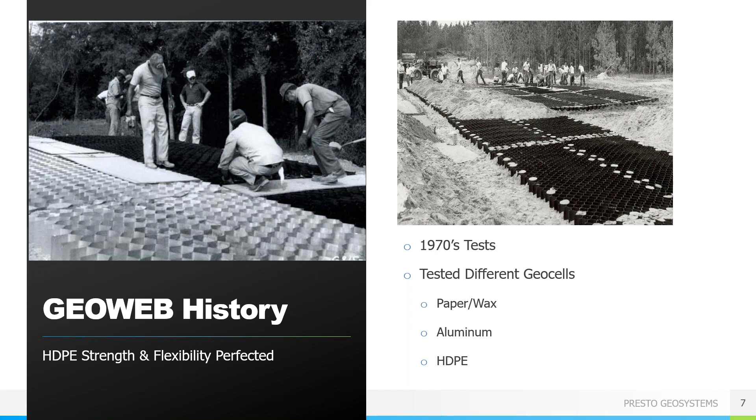What the Corps was looking to do was make beach landings easier by confining that loose beach sand, and they were quite happy with the high-density polyethylene in the end.

The GeoWeb system consists of two main attributes: cell size and cell depth. The cells come in three diameters—small, medium, and large—and cell heights of 3, 4, 6, 8, and 12 inches. Cell aperture and height are selected following an evaluation of project-specific needs and site conditions. To facilitate installation, we offer 5 different section lengths.

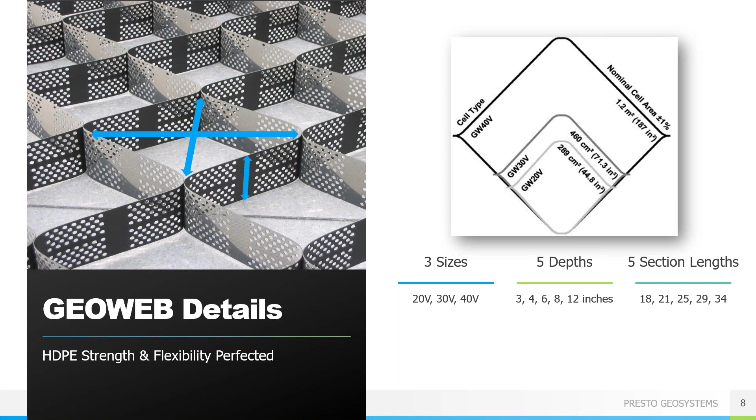The ultrasonically welded seam, where all of the connecting points are, is very important to the function of a geocell. The stronger the seam strength, the better the performance of the geocell. Strong seam allows for a heavier infill material, steeper and taller slopes, and better lifetime performance.

GeoWeb is produced using high-quality virgin, high-density polyethylene resin for consistently strong welds at cell junctions, while also maintaining semi-rigid ductile properties within the cell walls, high stress crack resistance, and overall toughness and long-term durability in the environment.

Our geocells do not use fillers or exotic polymer alloy blends, which can ultimately reduce weld strength and environmental stress crack resistance, and that are offered in some competing products in the name of increasing cell wall stiffness. To avoid weld failures and the damaging effects of differential settlement, uniformity in performance across all elements of a geocell system is much more important than stiffness alone.

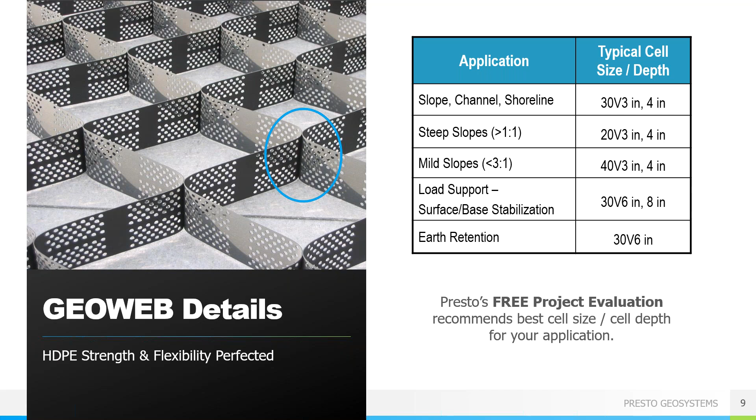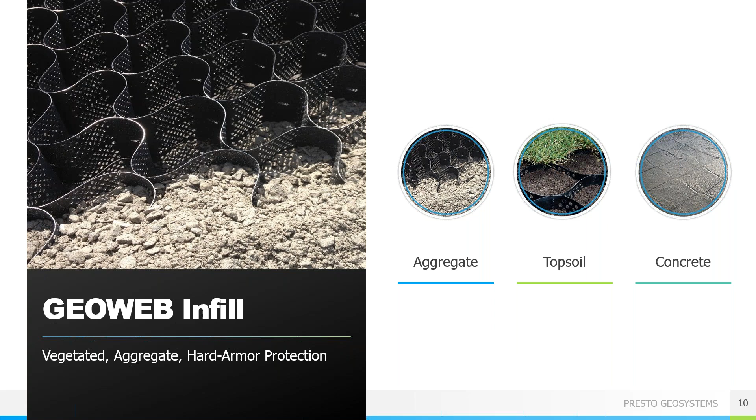There are three main infill types for any GeoWeb application, depending on the type of protection needed: topsoil, aggregates and granular soils, and concrete. In most cases, geocells allow for the use of on-site materials without the need to import fill, generally with the only limiting factors being that the material should be angular and the maximum particle size should be about 1/3 the cell depth.

Here we can see how the material ships. It's tri-folded, banded, and palletized. So it does ship quite compact, which can lead to relatively low freight costs.

The material is lightweight, so no heavy equipment is needed for installation. The nominal width for each section is 8.5 feet, but you can make them longer and skinnier, or shorter and wider. We do want to keep that width dimension between about 7.5 and 9.3 feet.

The length will depend on the amount of expansion and the number of strips welded together. Generally speaking, the length can vary between 12 and 58 feet long, with the 8.5 by 27 foot section we're showing here being pretty typical, giving you about 230 square feet of coverage for each section.

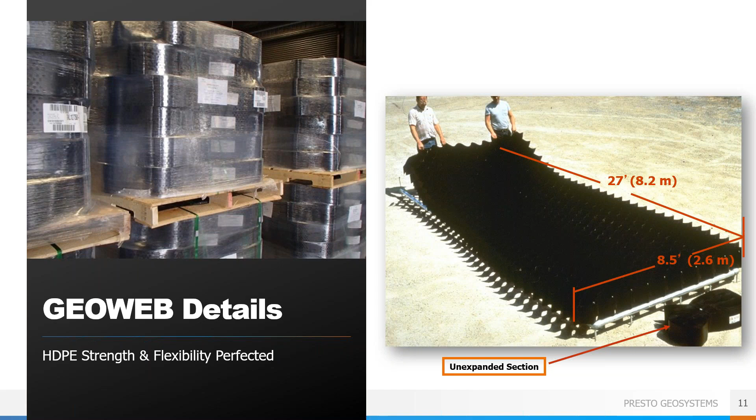In order for a geocell system to perform uniformly, it is critical that both the factory welded junctions or internal junctions and field joined junctions that connect individual panels together perform at a level commensurate with that of the cell walls. The three primary elements of any geocell system—cell walls, internal junctions, and connectors—must perform uniformly as a complete system. Therefore, an incremental improvement in one characteristic, such as cell wall stiffness, is only valuable if a complementary improvement has been made in the other components of the system.

GeoWeb is manufactured using a proprietary blend of high-quality virgin HDPE. Our formulation has stood the test of time for more than 40 years and contains no fillers, unstable polymer combinations, or alloys. For most typical sites, GeoWeb will retain its durability, with lab testing indicating 149 years before any degradation occurs, even at full exposure to the elements.

We stand behind our specifications so you can deliver certainty in the solution as you build with materials you can trust.

Made from high stability inert materials, GeoWeb geocells are your permanent stabilization solution and will not degrade, leach, or release microplastics into the environment.

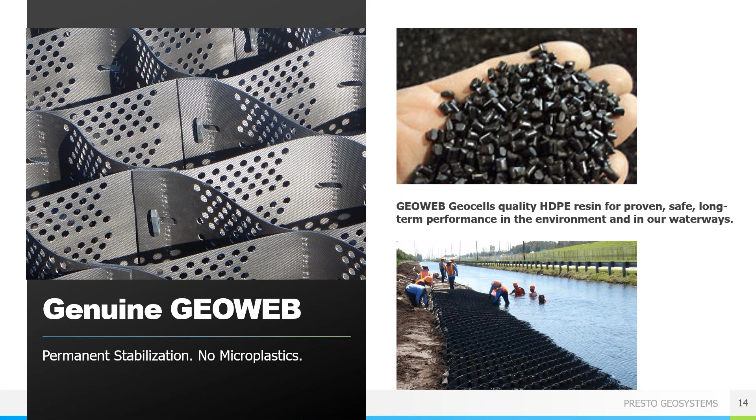Our base resin is the same material used in environmental applications such as geomembranes and other environmental barriers to protect against the spread of harmful toxins. Our products have been third-party tested by accredited geosynthetics laboratories, confirming long-term stability against environmental factors such as weathering and oxidation.

GeoWeb and all of our accessories are 100% made in the USA under strict quality assurance and environmental control processes, to comply with all requirements for Build America, Buy America, and the Infrastructure Investment and Jobs Act.

Presto's GeoWeb is equipped with numerous design and construction components that increase strength and speed of installations. We have a variety of staking options. The standard method is to use our Atra stake clips on top of a 1/2 inch diameter or number 4 rebar. But if long-term corrosion is a concern, we can also provide high-density polyethylene speed stakes.

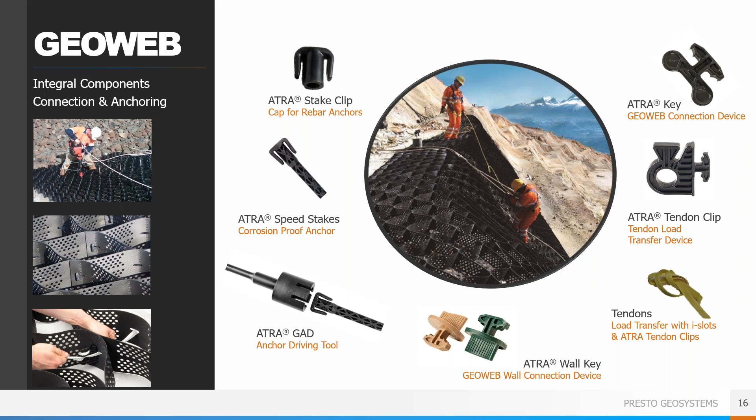Atra keys are the mechanical connection I mentioned a few slides ago. Not only do keys provide the uniformity we discussed, but they are made of the same HDPE material as the GeoWeb itself, so they will last just as long. Beware of manufacturers that recommend staples or nylon cable ties, as these do not have the same long-term durability as HDPE.

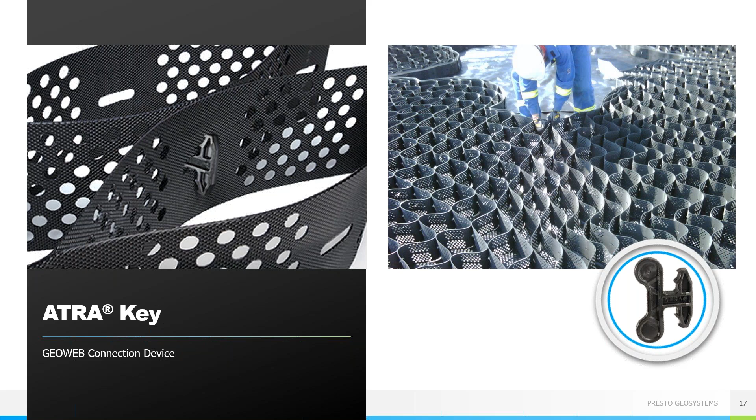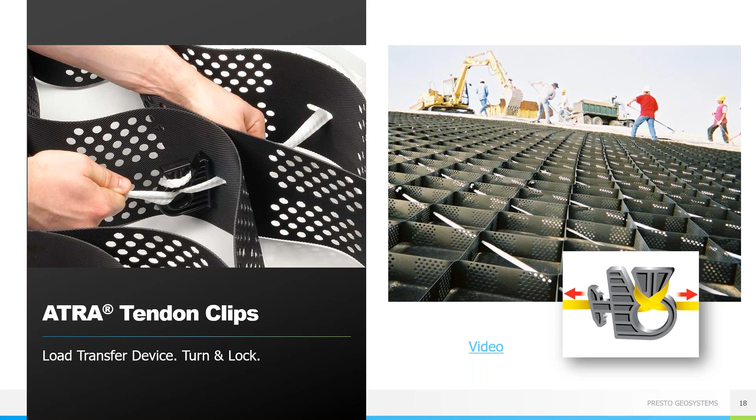The tendon and Atra tendon clip system is ideal for anchoring the GeoWeb on slopes without the need for stakes, which would penetrate the liners used on most landfills. The tendons are tied to either earth anchors or a deadman pipe, which can typically be buried in the same trench as the liner at the crest.

Now we'll go into a little bit more detail on each of the landfill relevant application areas, starting with load support.

GeoWeb can be used for both surface stabilization of unpaved roads and base stabilization below pavements. Many solid waste facilities must contend with maintaining unpaved access roads. Not only can GeoWeb save money up front by allowing you to reduce your overall cross section, but incorporating GeoWeb into the roadway section can also help minimize or reduce annual costs associated with repair and maintenance of unpaved landfill roads that take a beating from heavy equipment and truck traffic.

Generally speaking, the benefits of using GeoWeb in load support applications are that we can reduce your overall aggregate section by 70% or more. We control lateral and vertical infill movement, which prevents shearing, and we create a stiff base with a high flexural strength.

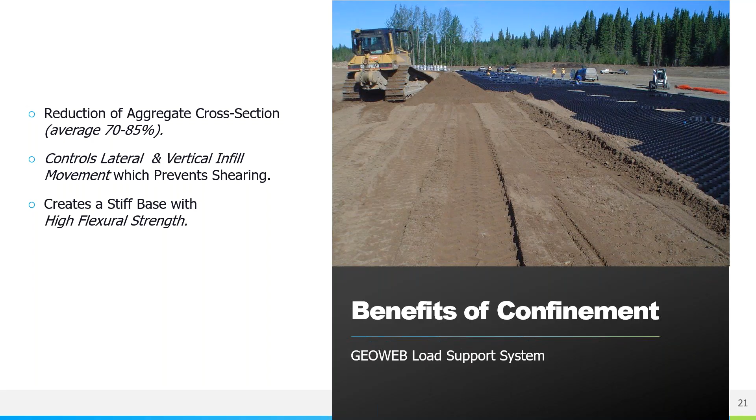Here's how the GeoWeb three-dimensional system works. When a vertical load is applied, the active earth pressure in the loaded cell pushes back against the passive earth pressure in the adjacent cell to form a stable system. Each cell helps support the ones around it.

The GeoWeb cell walls also transfer hoop stress, which is important in keeping the system intact and creates a mattress effect. The strength of the seams around each cell, the material properties of the individual strips, and the connection method between panels are all important factors in determining how the GeoCell system can improve site conditions. Strong seams, semi-ductile resin properties, and integrated connections are critical to a well-performing system. The GeoWeb system and accessories are specifically designed to work together to be an effective solution for roads in soft soil locations.

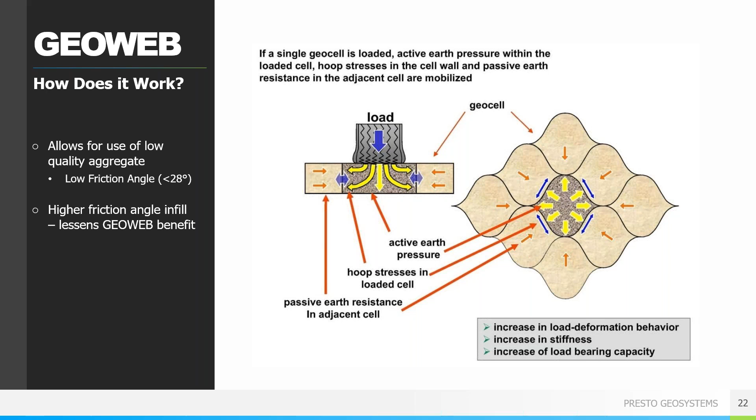Here you can see the stresses on the subgrade, with the unsupported subgrade on the left and the GeoWeb reinforcement on the right. Notice how there is a complete elimination of the highest stresses at the surface with GeoWeb reinforcement. The stresses are reduced and distributed over a wider area, known as the mattress effect. This reduces stress reaching the subgrade and leads to a significant decrease in deflection and rutting.

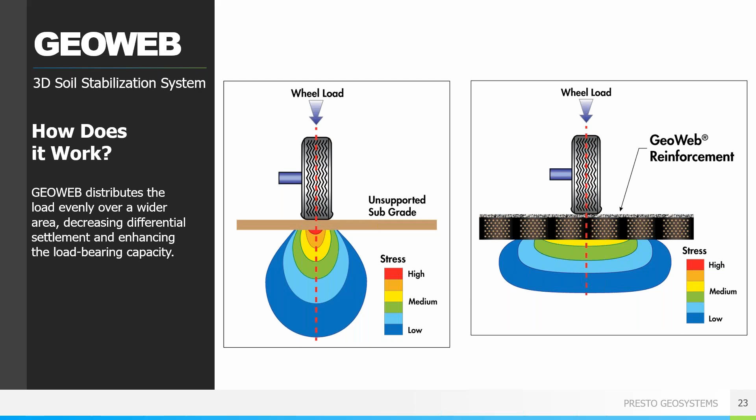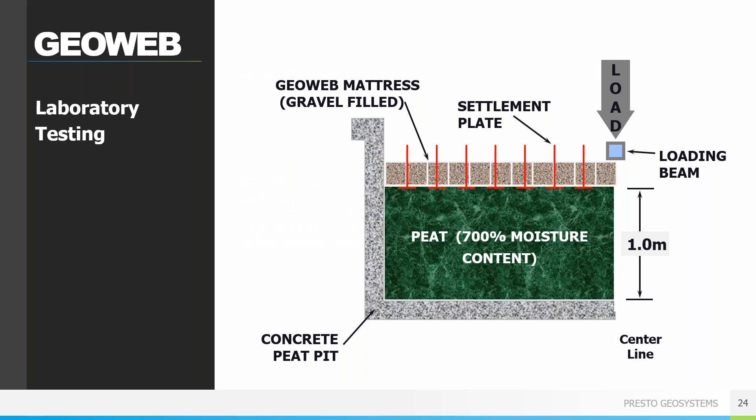I want to quickly review a little of the research that we've done in the past to help increase your confidence in the use of GeoWeb. This first one is a static load test where we started out with a supersaturated peat mixture that was put under varying loading. Over the peat, the GeoWeb section was placed and infilled with aggregate. Settlement plates were placed throughout the GeoWeb section prior to its placement, and a load beam was placed over the GeoWeb and loaded to failure. This was then compared to the same depth of unconfined soil.

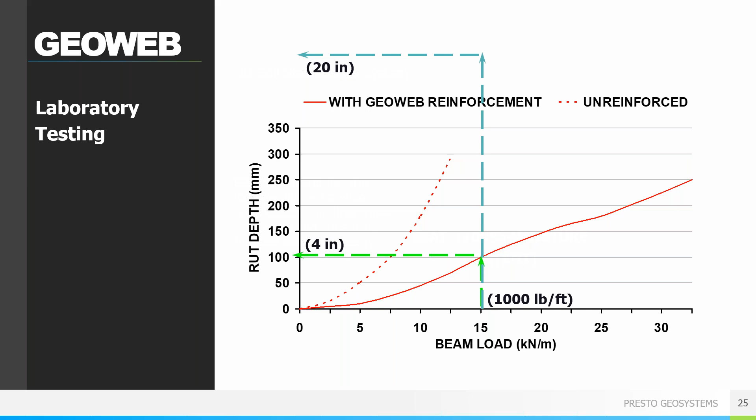The beam test showed that the bases reinforced with GeoWeb provide a significant improvement over unreinforced soils. So for a load of 1,000 pounds a foot, a 4-inch rut depth occurred in the GeoWeb section, whereas that rut was 20 inches in the unreinforced section.

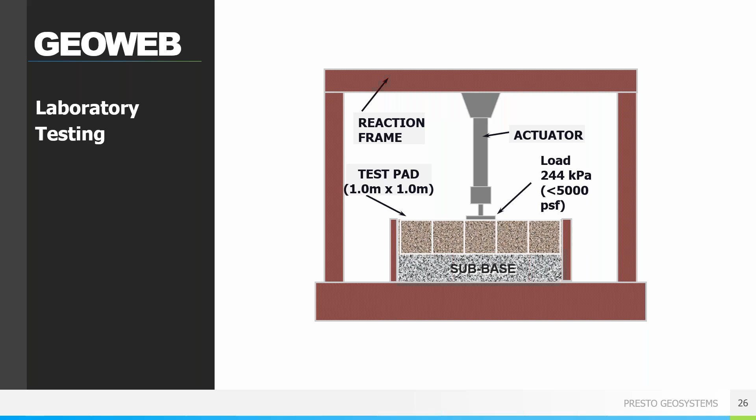Since the previous testing was under static loadings, we also tested under a repeated dynamic load. Pavement load testing compared reinforced and unreinforced materials over the same subgrade. A deflection of 0.6 of an inch is assumed to lead to failure of the pavement system. Therefore, we applied the load repeatedly until that 0.6 of an inch of accumulated deformation occurred. Without the GeoWeb in the section, that took about 25,000 load cycles. By adding GeoWeb, we're all the way up to 400,000 load cycles, an improvement of about 16 times the number of load cycles for the very same deformation.

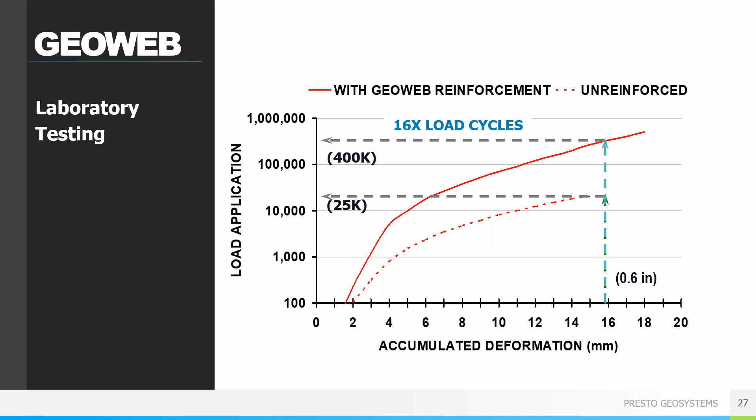We'll now look at a couple of quick videos showing how simple the installation is. Or maybe just one video.

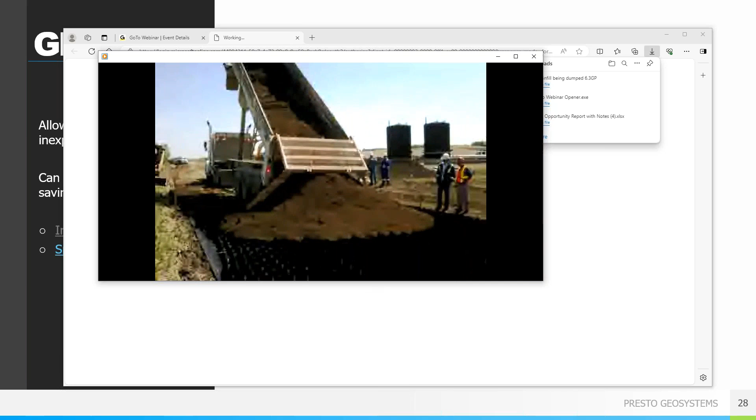Here you can see that truck can back up right to the very edge of where the cells are already filled, and they can simply empty out the bucket. Then they put a bulldozer or backhoe on it and spread the material that way. So it's a very quick and easy installation.

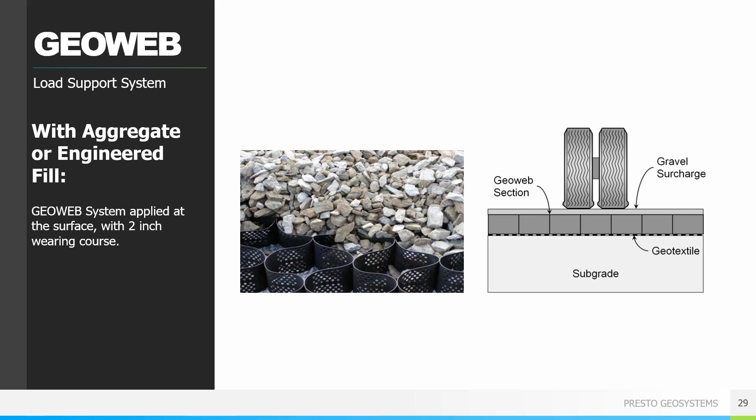Our typical section has a geotextile below the GeoWeb panels. That can be anything from a 6-ounce non-woven to an enhanced woven, depending on your subgrade strength and maximum loading. Then the GeoWeb is generally filled with aggregate, and we do recommend a 1 or 2 inch wearing surface over the panels themselves. Now we'll look at a few examples.

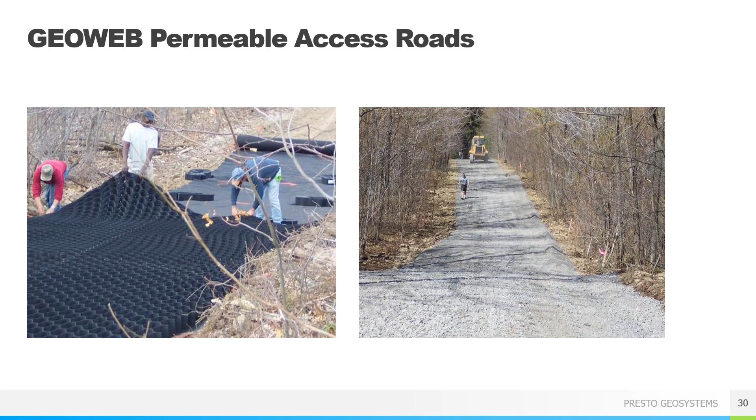Keep in mind, you get infiltration with clean stone infill only, and the permeability of the infill is going to be your limiting factor. Here, 8-inch GeoWeb and aggregate with a 40% void space was used. This allowed for 3 1/4 inches of rainwater to be stored in the pavement section, eliminating the need for additional stormwater infrastructure. You can also see the extremely heavy loads that are able to be handled by the GeoWeb system.

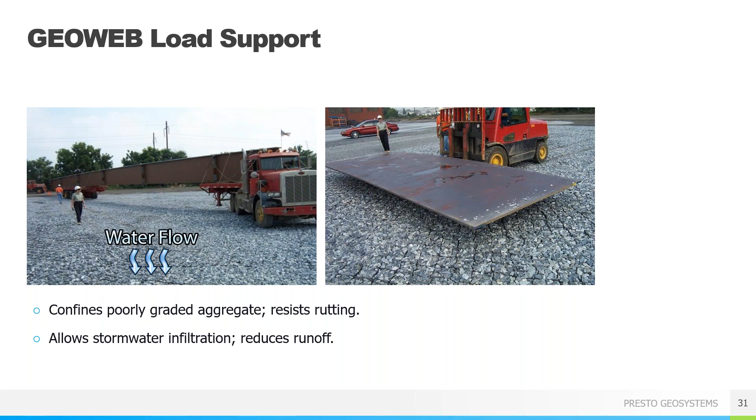One of the biggest questions we get is about cost, which comes as no surprise. So the GeoWeb system costs compared with other stabilization techniques is very important.

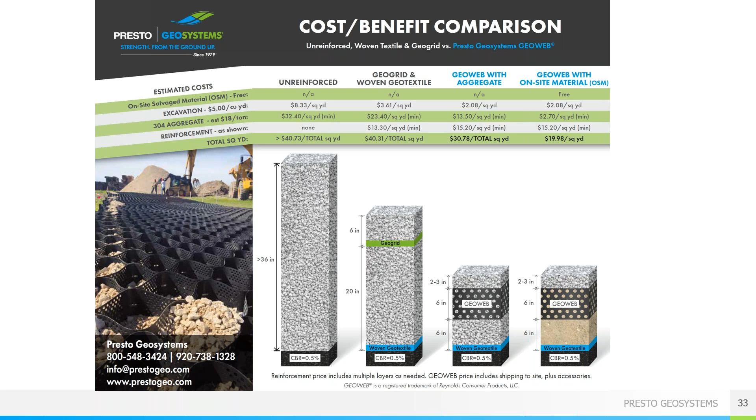We'll now move on to discuss how GeoWeb can be used in stormwater conveyance, a critical component of any landfill design.

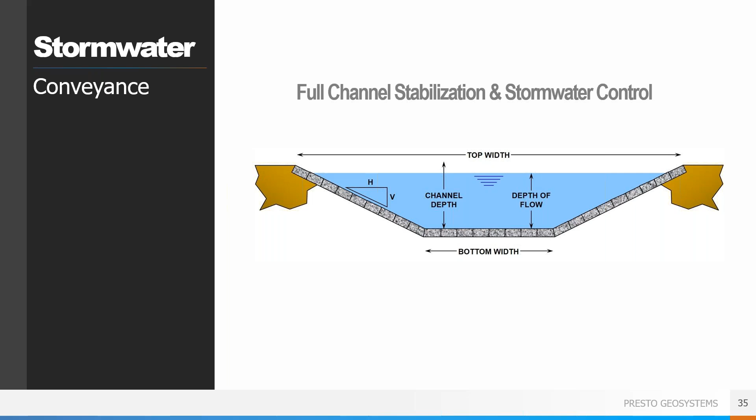Open channel designs with the GeoWeb three-dimensional system offer a more economical solution than riprap, gabions, or reinforced concrete, systems that are expensive and hard to place and maintain. The cellular network creates a system of check dams that protect the upper soil or aggregate layer from hydrological erosive forces that impact unconfined material. And the GeoWeb is going to be much more effective than two-dimensional solutions such as turf reinforcement mats or erosion control blankets that are subject to undermining.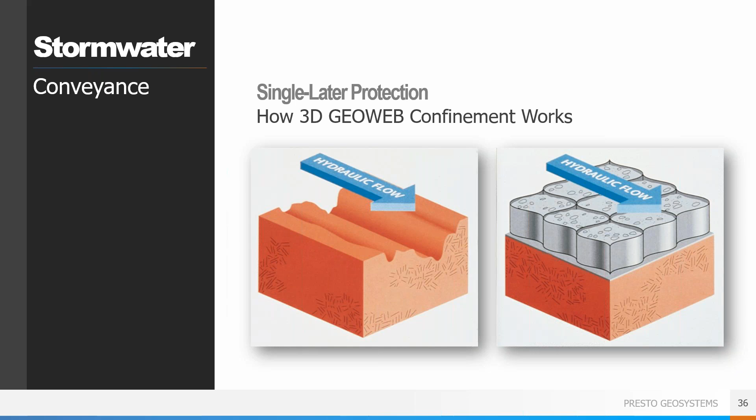The benefits of using GeoWeb in channels are that it will improve the hydraulic performance of whatever infill material you use. With a vegetated infill, we promote infiltration and reduce runoff. With an aggregate infill, we allow the use of smaller, less expensive rock. And with a concrete infill, there's no other form or reinforcement required, and it will flex with subgrade deformation and minimize cracking. Additionally, you can reduce your concrete thickness, leading to significant savings.

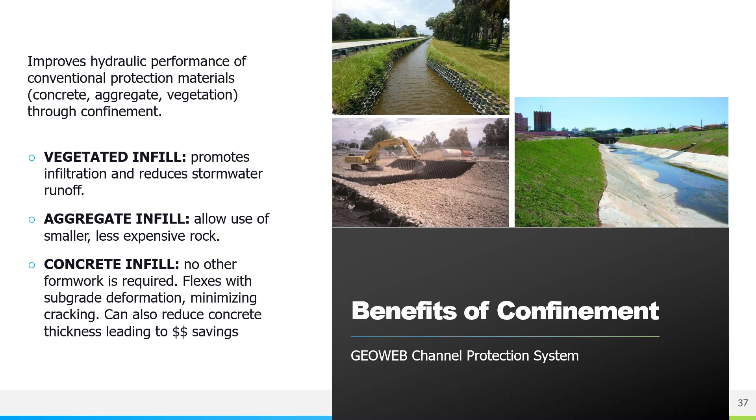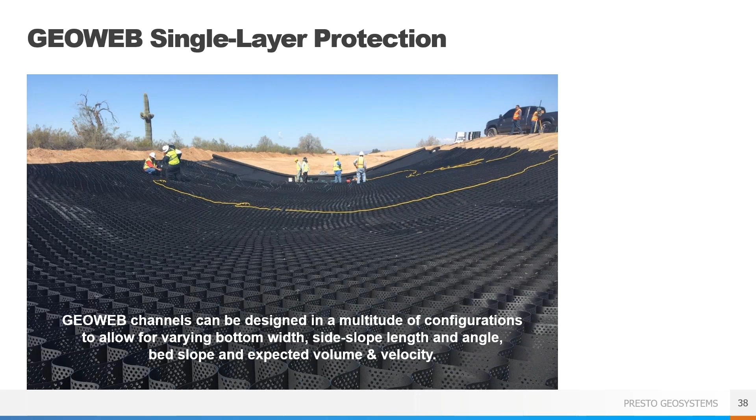Cell size, depth, and anchorage, as well as infill type, are determined based on channel geometry and hydraulic conditions. As mentioned earlier, free project evaluations are available on all projects, regardless of size. The cross-section like you see here, as well as calculations, are provided with every evaluation.

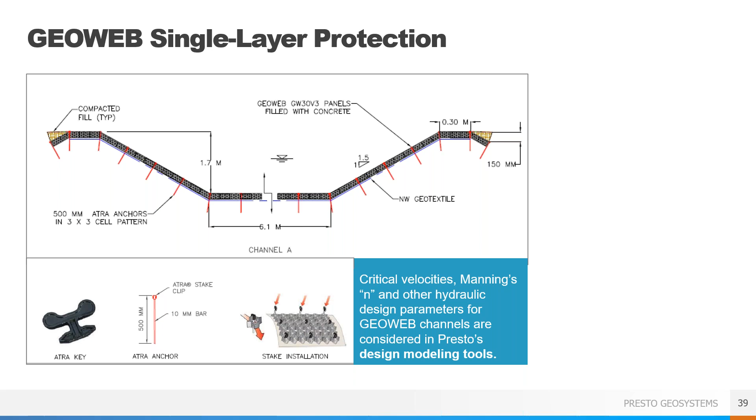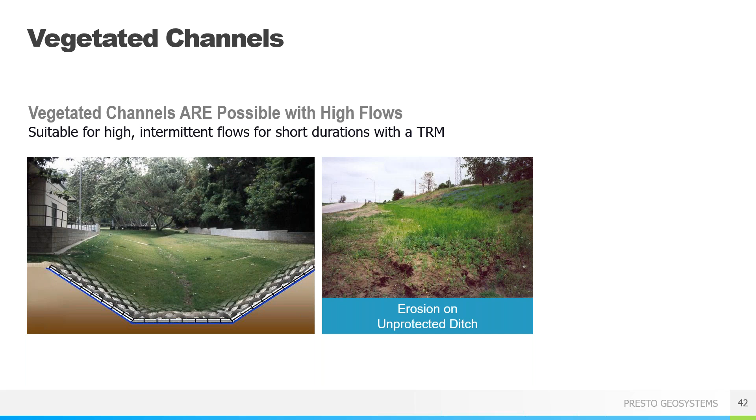Now we'll look at how GeoWeb works with the various infill options, starting with topsoil and vegetation. Generally speaking, low-flow channels like stormwater containment facilities and stormwater channels can be armored with topsoil-filled GeoWeb and covered with an erosion control blanket. But even in high-flow situations, we have a solution that can allow you to protect channels from erosion and maintain the aesthetics of vegetation. This solution involves topsoil-filled cells covered with a turf reinforcement mat, or TRM.

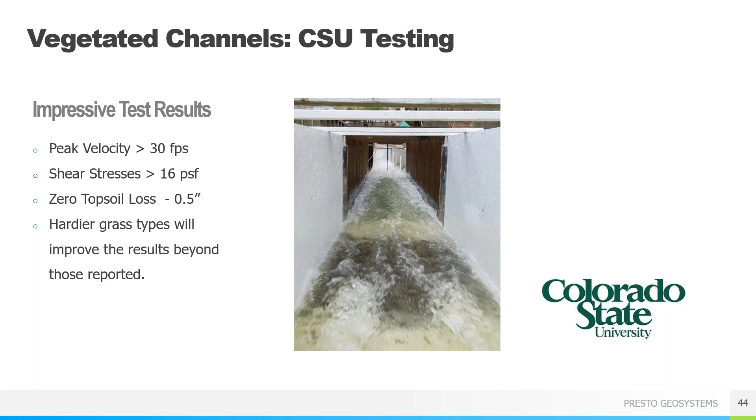We tested the vegetated GeoWeb covered with a mid-grade turf reinforcement mat, not one of the newer high-performance TRMs, and received great results with peak velocities of nearly 30 feet per second and shear stresses of 16 pounds per square foot.

When we compare our results with some other standard practices, we see that we have more than twice the hydraulic resistance of 12-inch riprap and about double the performance of a high-performance TRM alone.

This combination system works because the TRM provides a cover so the GeoWeb does not scour out under high velocities, and the GeoWeb will confine the soil below the TRM so that the system won't fail when saturated. So in an unvegetated condition, GeoWeb will improve the hydraulic performance of a TRM alone by 50%.

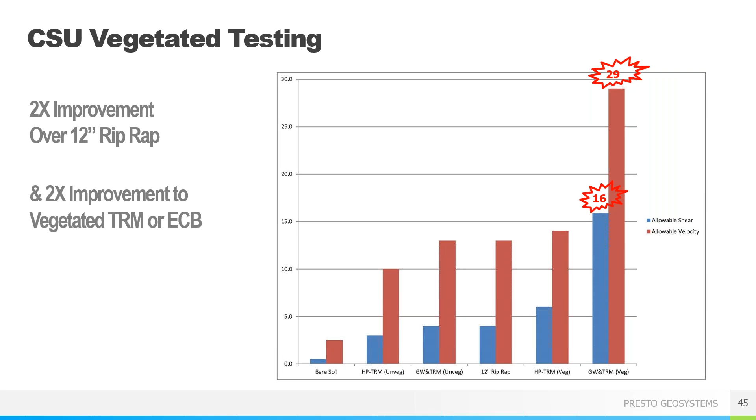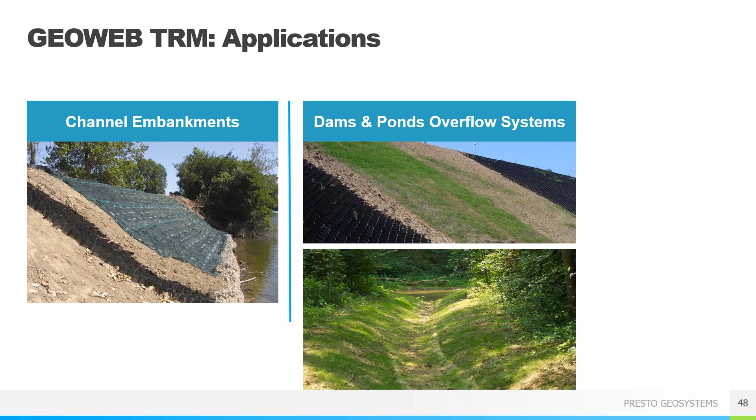Typical applications for this system include roadside ditches, spillways, channel embankments, or dam and pond overflow systems, really suitable for any situation where you have high velocities but for relatively short durations. You can then maintain vegetation in areas that would previously have been concrete or very large riprap.

We can also provide an aggregate-filled solution. Generally, aggregate is used in arid regions where vegetation is difficult to establish or for areas that are typically underwater.

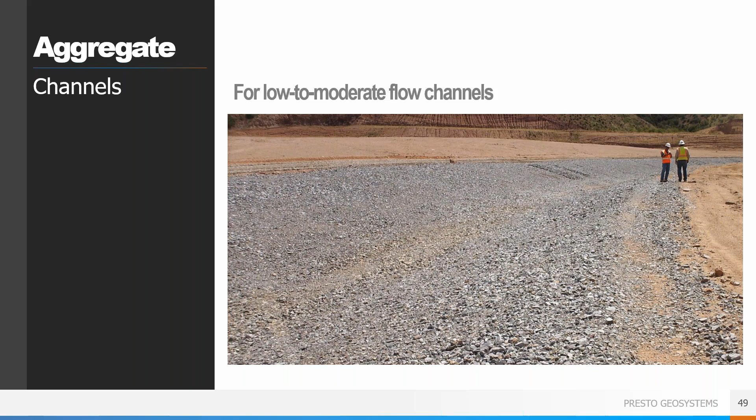For the aggregate solution, we tested all three cell sizes and two different rock sizes, and then we ran a total of 90 tests. With all those data points, Colorado State was able to run a regression analysis and provide us with this regression equation. So now, given the bed slope and the unit discharge of any channel, we can manipulate the median rock size and the cell size until we get to a point where our rock loss is zero.

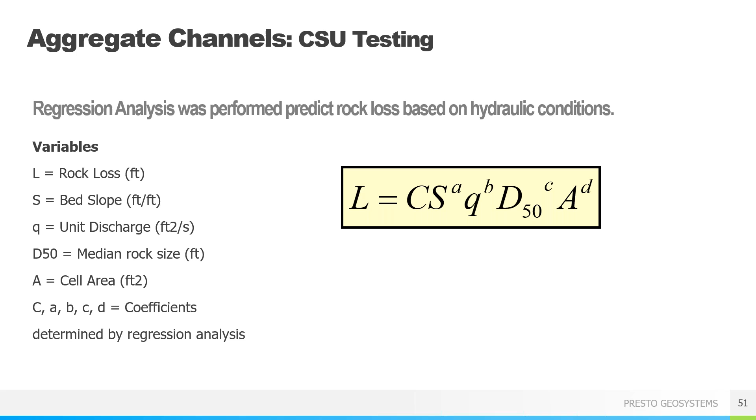And when compared to traditional riprap sizing tools by Abt and the Corps of Engineers, we can prove that we can reduce the rock size anywhere from 2 to 10 times, which can lead to significant savings, not only in your rock costs, but also transportation and installation costs as well.

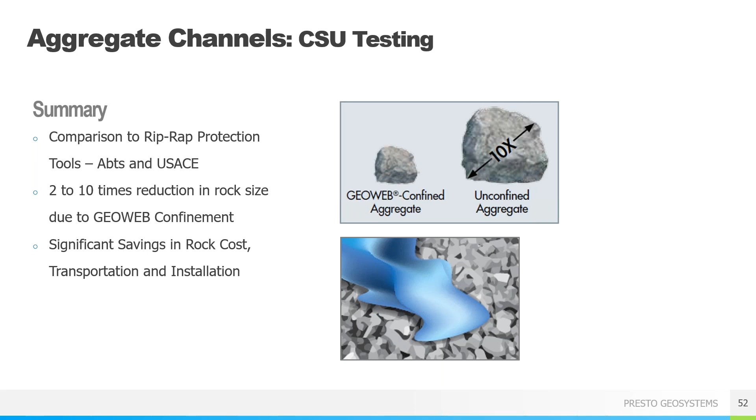And finally, for your most challenging applications, concrete-filled GeoWeb. Poured in place with no additional forms or reinforcement, this allows for easier to place, higher slump concrete. And it is a flexible system that can withstand settlement very well, which is, of course, very important in landfill applications. We'll also assure uniform concrete depth, and typically a 3-inch concrete-filled GeoWeb can replace a 5 to 6-inch section of reinforced concrete.

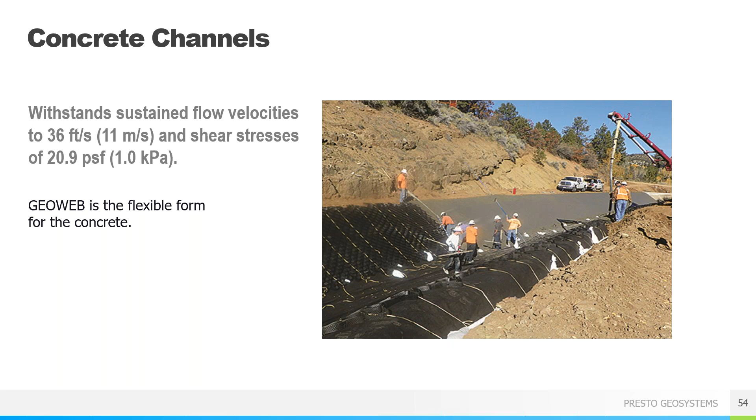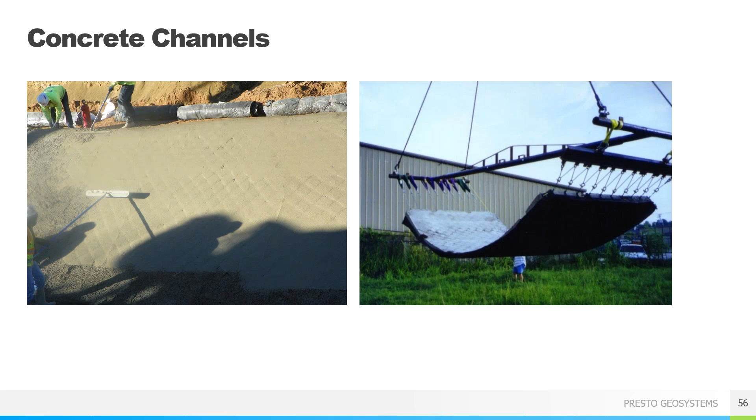Once anchored in the channel, the GeoWeb allows for concrete to be either pumped or poured right into the cells. The concrete is then screeded and finished to the tops of the cells. And notice the flexibility of the concrete-filled GeoWeb panel is displayed on the right. It won't crack like poured in place concrete will.

Again, the system was tested at Colorado State with very impressive results. The 3-inch deep cells filled with concrete were able to withstand 36 feet per second and 21 pounds of shear. And we didn't even fail the system at those velocities, but rather maxed out the flume.

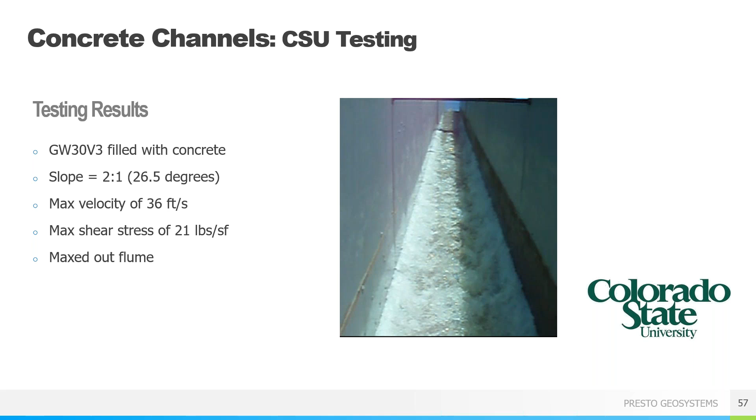Now we'll look at a few examples. The regional municipality of Waterloo in Ontario, Canada, faced the challenge of creating an effective yet simple method of erosion prevention while removing stormwater from their newly capped cell at the Cambridge landfill. The protection system had to be durable and stable under a variety of hydraulic and mechanical stresses.

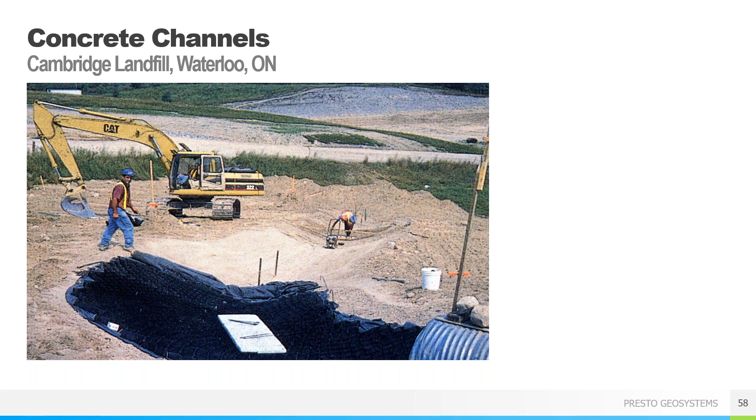Concrete-filled 4-inch deep GeoWeb panels were selected due to previous in-ground success with the system, the ability of concrete to limit vegetation growth in the bottom of the channel, and the overall flexibility of the system to conform to potential subgrade movement. A total of 15,000 square feet of GeoWeb was installed at the landfill, and the system was anchored with stakes in channels varying from 7 to 20 feet wide, with bed slopes up to 14.5%.

The perforated GeoWeb system maximizes the mechanical bond between the concrete and cell walls, locking the concrete infill into the individual cells of the system. The concrete-filled system forms a uniform thickness mat which controls concrete quantities and cost. The system prevents uncontrolled cracking of the concrete and reduces the chances of piping or undermining.

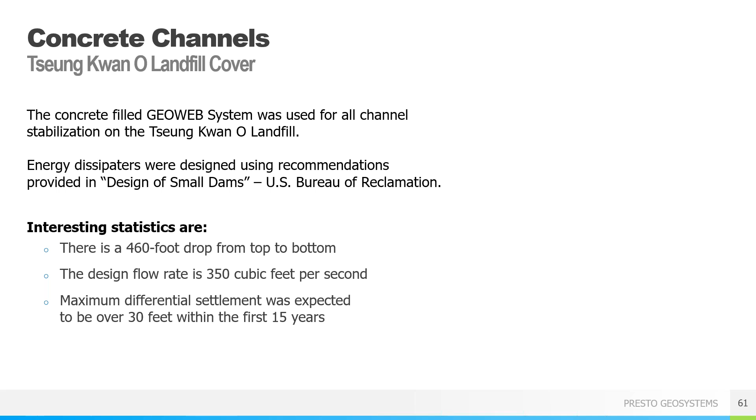Next up is a project that we did at a landfill in Hong Kong. And you can see here we had a 460-foot drop from top to bottom with design flow rates of 350 cubic feet per second and maximum differential settlement expected to be 30 feet within the first 15 years.

This diagram shows the location of the baffle blocks in cross-section and longitudinal section. The blocks were placed in the channel invert as well as on the side slopes, approximately every 8 feet downstream.

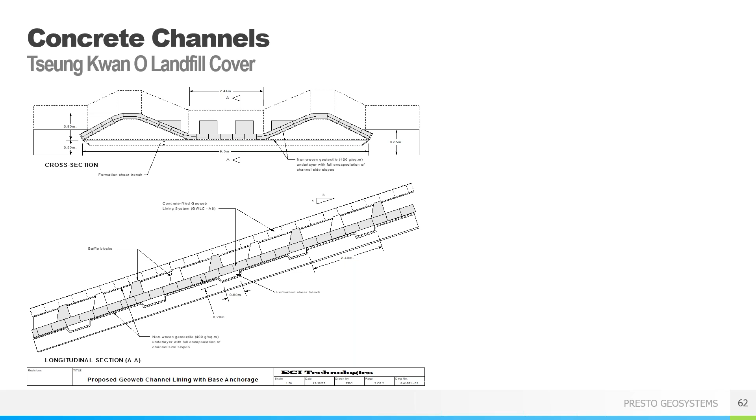Now we'll take a closer look at the installation. Here, the X's on the geotextile underlayment mark the location of the energy dissipator blocks. The GeoWeb was then placed and cut at block locations to make room for the energy dissipators.

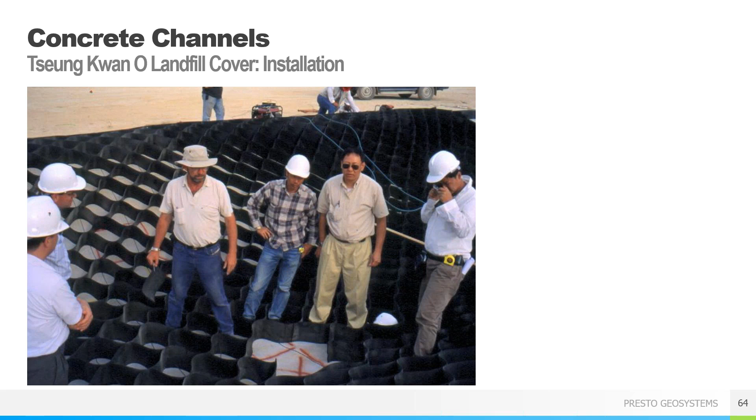Next, the blocks weighing about 500 pounds each were placed. It's hard to see here, but the blocks are tapered from bottom to top. This way, when the concrete is poured into the cells, the blocks are locked into place.

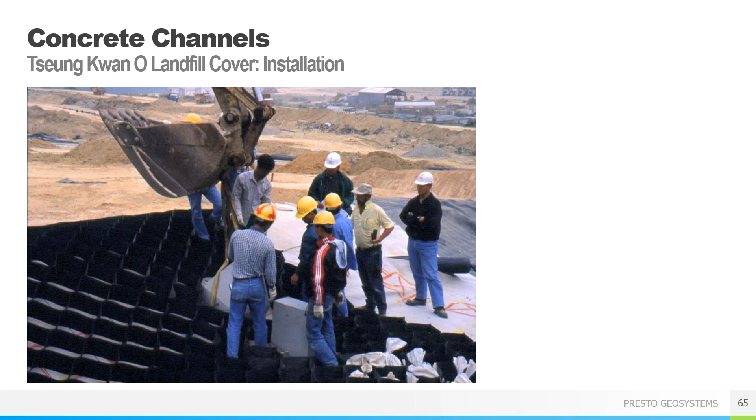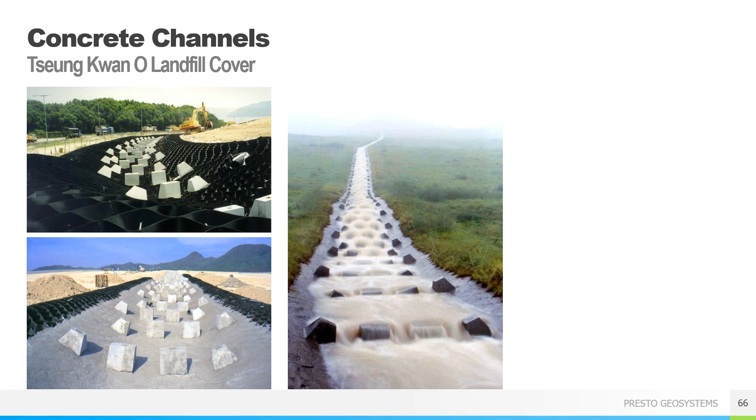Finally, the concrete was poured with some of the slopes being in excess of 20%. Note the change in infill type with concrete on the bottom and up the sides, transitioning to a topsoil vegetation at the crest and on the back side of the berms. With the GeoWeb system, transitioning to different infills to handle various hydraulic conditions is quite easy.

The channels drain not only the top of the landfill, but also drain across the landfill through flexible piping buried a few feet below grade.

Finally, we move to slope protection. GeoWeb is a state-approved product for use in landfill capping applications. As of May 2020, GeoWeb was recently added to the North Carolina Department of Environmental Quality Guidelines for addressing pre-regulatory landfills as an approved technology for use in soil cover systems.

As mentioned earlier, tendons and Atra tendon clips allow for anchorage without penetrating geomembranes. Tendons are either tied to buried deadman pipe or earth anchors, and the entire system is draped from the crest, with the clips serving to distribute the loading so as to not overstress any of the welds. The number and type of tendons—we have Kevlar, polyester, and polypropylene available—as well as clip spacing are provided as part of the evaluation process.

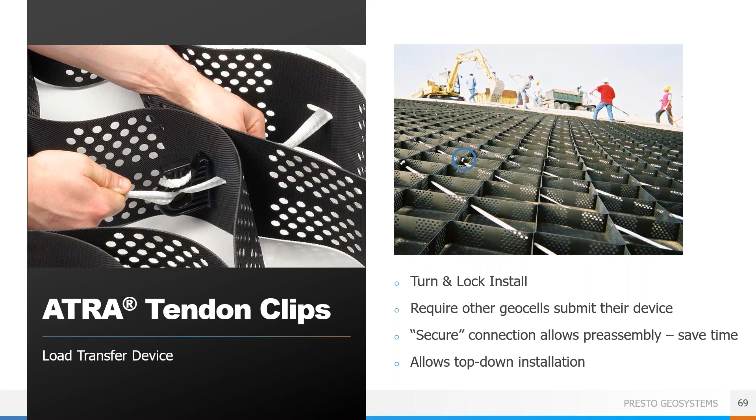Here we see an example of the tendon system over a liner. Again, no stakes are needed, allowing the integrity of a liner to remain intact. This is a pond at a golf course in Tennessee, and they didn't need to protect the entire slope as the water level varies only along the length of the GeoWeb panels. The GeoWeb serves to prevent soil erosion in the areas of the water level fluctuation.

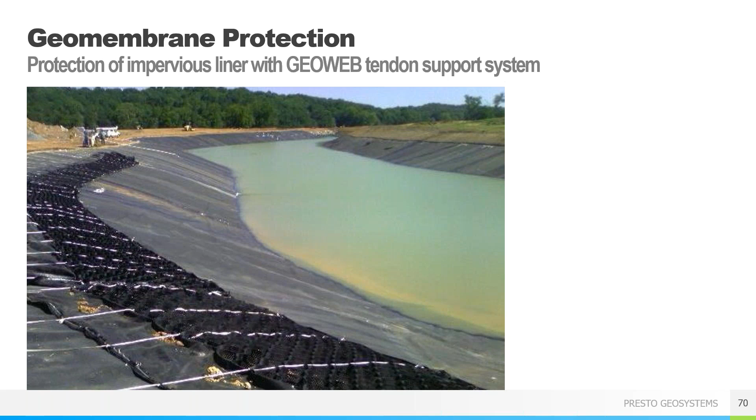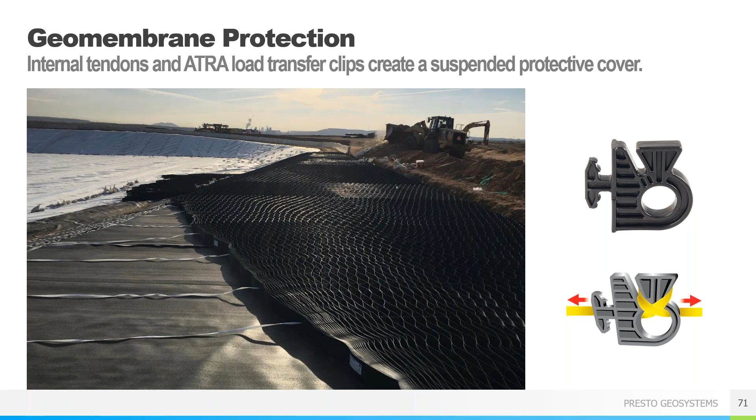Here we have a borax mine in Southern California, again using tendons and tendon clips over a liner. GeoWeb is used for the access ramps into large containment ponds for cleanout operations. And it was placed at a 45-degree angle across and down the slope for access. In vegetated solutions, confinement prevents topsoil from washing out during rain events and/or with fluctuating water levels.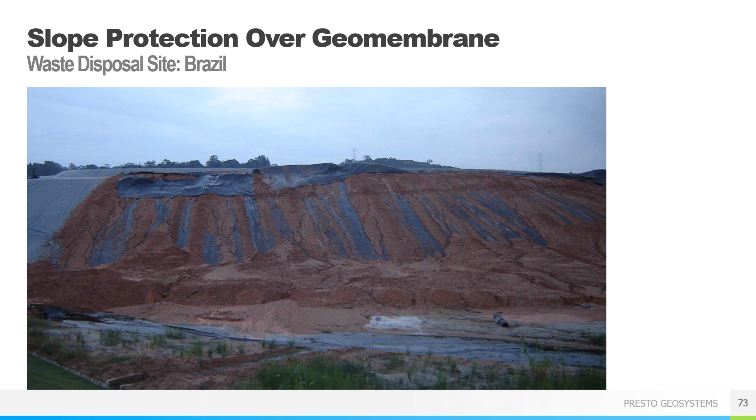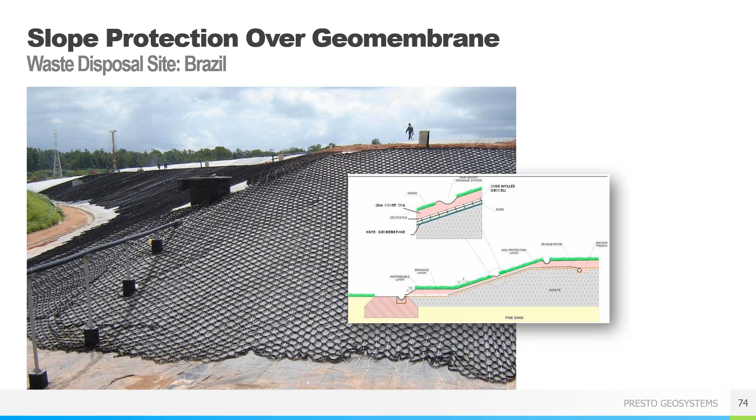The 68th Street Dump Superfund site, located in Rosedale, Baltimore County, Maryland, covers a substantial 239-acre area and comprises multiple landfills. These landfills were operational from the 1950s to the 1970s, accepting a wide range of industrial and commercial waste. Over the decades, hazardous substances accumulated, posing a significant environmental and health risk. In response, the site was designated a Superfund site, necessitating a comprehensive remediation strategy to prevent further contamination and ensure public safety. Here we see the condition of the slope after grading, but prior to the installation of the permanent GeoWeb cap.

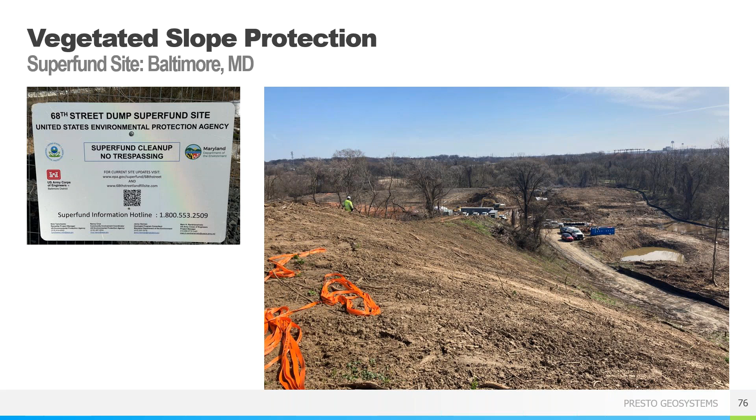The solution involved capping 51,000 square feet of the landfill, basically all the slopes that were 3 to 1 and steeper, using the GeoWeb soil stabilization system. In this case, we used our 30V12 material, which is our 12 or mid-size cell, 12 inches deep. And this innovative approach ensured a robust and stable cap, effectively containing the hazardous materials and meeting the EPA's requirement of a 12-inch cover. Representatives from Presto Geosystems and the local distributor provided on-site technical and installation support to ensure the success of the project.

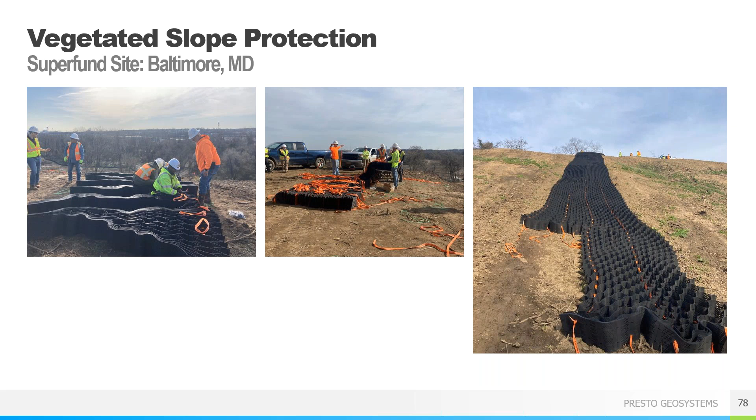The GeoWeb sections were pre-assembled at the crest of the slope with tendons and ATRA tendon clips, which were then anchored at the crest of the slope. Sections were connected using the patented ATRA keys. The keys are inserted through adjoining GeoWeb cell walls, turned and locked to provide the most secure connection. And ATRA tendon clips were used to secure the tendons running through the GeoWeb cells. These clips locked with the GeoWeb cell walls with a looped tie-off, ensuring the tendons remained securely attached. The setup was crucial in preventing the slope system from shifting, providing an effective erosion control solution. And the anchored GeoWeb sections were deployed down the slope, ensuring that each section was securely anchored and properly aligned.

Here's a highway slope where iron pyrite was exposed during excavation. When exposed to air and moisture, there is a potential for acidic runoff with elevated concentrations of contaminants. Here, the slopes were covered with a geomembrane, and aggregate-filled GeoWeb was placed over the liner as a protective layer. The slopes were up to 1.5 to 1 and up to 200 feet high. While not a landfill, design principles were used.

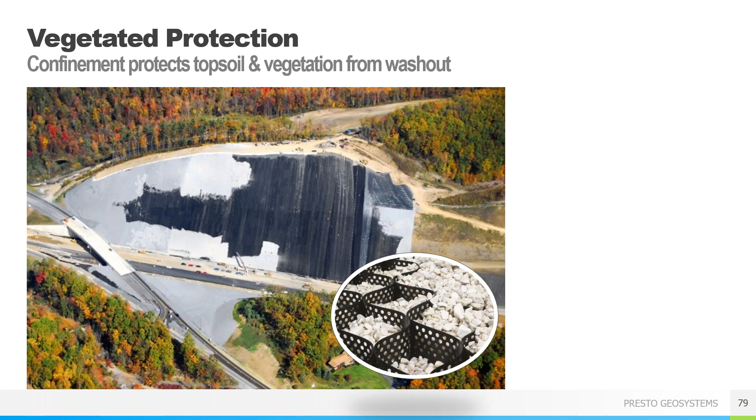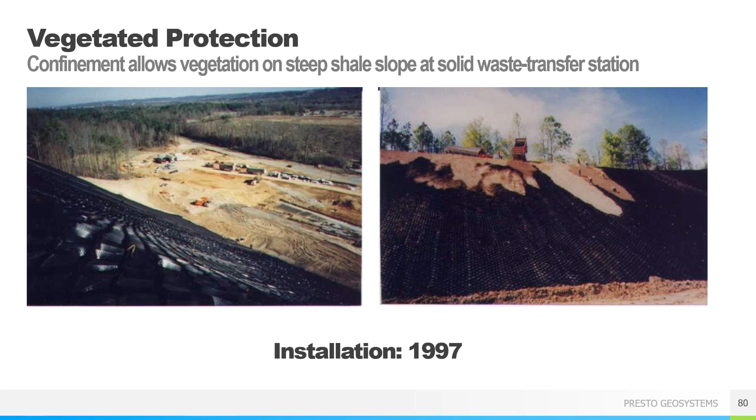Finally, a project from 1997 that does not involve a geomembrane, but rather preventing erosion of the up to 200-foot high, 1.5 to 1 shale slope at a solid waste transfer station in Jefferson County, Alabama. Other solutions that were looked at were riprap, which was deemed too expensive, and building a retaining wall at the bottom of the slope to collect the inevitable erosion, which was deemed to be too much maintenance. Eventually, the solution that was selected included a 4-ounce nonwoven geotextile to provide separation and an in-plane drainage layer, and 3-inch topsoil-filled GeoWeb panels.

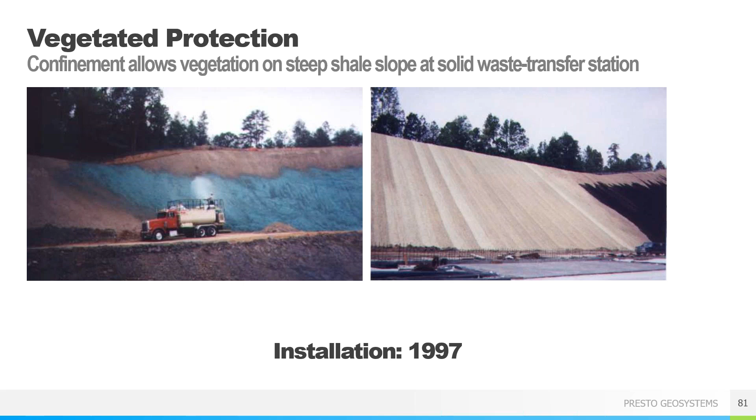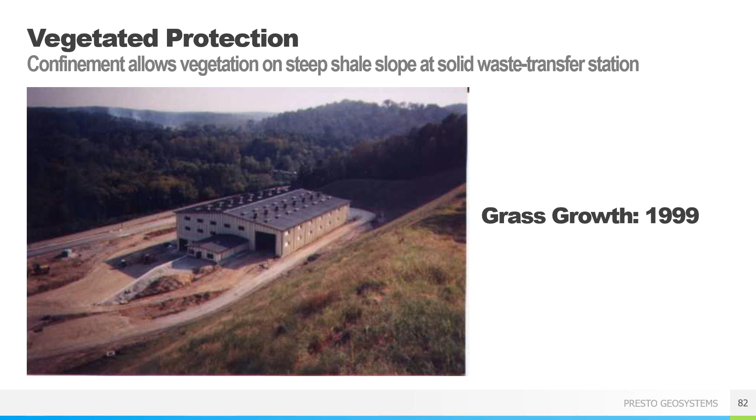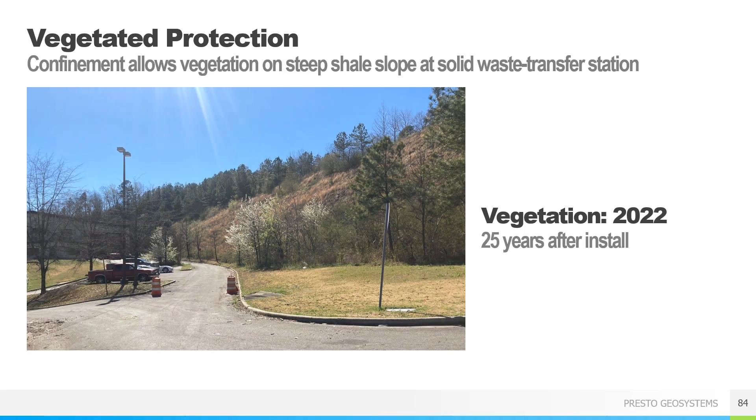In summary, every project is different, but the GeoWeb system has a solution that is right for you. The GeoWeb system can be added to road projects to provide a more stable and longer lasting surface course for unpaved areas, which will reduce maintenance and repairs. For paved surfaces, GeoWeb decreases pressure on the subgrade to reduce differential and long-term settlement, which will extend pavement life. The ability to use low-quality aggregate or even sand can save a significant amount of money.

Whether you're looking to stabilize your roadway, protect your embankments, or manage your stormwater runoff, the GeoWeb system has great flexibility of design to meet your project needs. And it is a complete system solution for ease of installation and peace of mind.